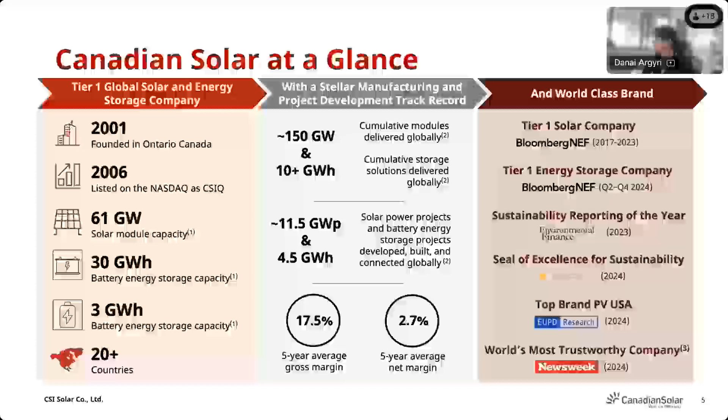On the manufacturing end, which is what we're going to focus on today, we have had cumulative shipments of 150 gigawatts, with 31.1 of them being delivered in 2024. Now, we do have a total system solution approach where we provide inverter system kits, energy storage, and EPC services. EPC services obviously ties more into the project development part of the company, but we also have a wide network of partners like Franken Solar that assist us with being represented in projects across North America.

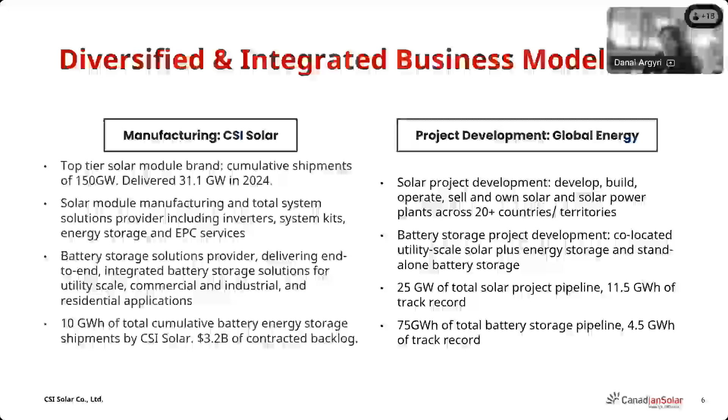Now, with the battery storage solution being also a part of the company, we are delivering end-to-end integrated battery storage solutions for utility scale, commercial, and even residential applications. So between those, we have had 10 gigawatt hours of total cumulative battery energy storage shipments and $3.2 billion of contracted backlog.

And we pair our manufacturing facilities according to the market segment that is being served. So, for example, even though we do have manufacturing facilities in Texas and we're creating one in Indiana, there's no reason Canada should be burdened with any of the additional cost adders that we see with US domestic manufacturing. So Thailand is better able to serve the supply needs for the Canadian market.

So rest assured that you're not dealing with any of the cost adders that we've had to implement in other markets in North America, so that we remain competitive there. Now, with all that being wrapped up, I can move us into the module portfolio.

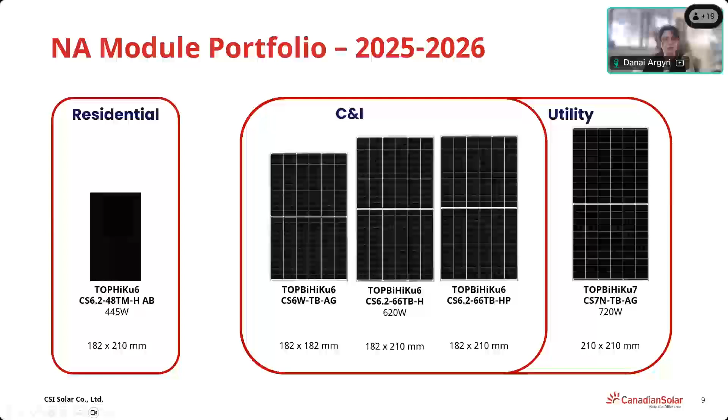Now, Susan, if you can help me launch a poll to see what feature is the most important to you in a residential module, I'd really appreciate it. So the answers here are high power and high efficiency, high loading pressure allowances, high temperature reliability and improved long-term reliability, or 4, a longer warranty period.

Okay, right now the votes are coming in. Yeah, I can see the data changing in real time. Perfect. It seems like for the vast majority, we have high power and high efficiency. And the second leader there being high loading pressure allowances. We can give everyone a couple more seconds to participate in the poll if they want.

It's a big topic nobody ever talks about, I think, with the high loading pressure. I do feel like panels have gotten weaker and weaker over the years, and larger, right? As they get larger and larger, exactly, they are becoming less tolerant. I do have a pretty big section on that, so you will allow me to geek out for a little bit on that. Perfect. And feel free to ask any questions at that point. One key selling point for me is that you don't necessarily have to reach the upper margin of the pressure allowances to be able to benefit from an overall module. So I'll explain my thought process behind that when we get there.

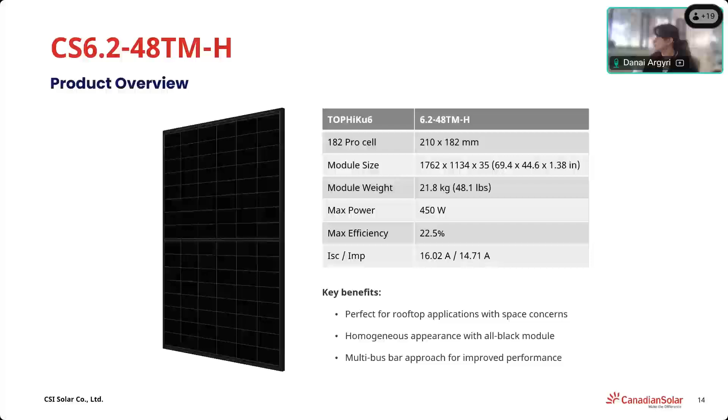Now, we've also implemented a multi-bus bar approach that helps us improve the performance of the module by mitigating the risk of microcracks, something that just naturally comes with the area. Now, I did mention that we do get a higher yield out of this module, and that is where the PTC rating comes in to quantify that benefit.

Now, PTC stands for PVUSA Test Conditions, and it's a rating that the California Energy Commission provides. So in the US, it's a strict requirement, especially if you want to get financed, to have the module that you're using listed on the California Energy Commission. And what they do as an organization is they try to evaluate what is going to be the output of the module that they're listing in conditions that more closely resemble what's going on in the field.

So when we say that we have a 450 watt module, that means that when put under standard test conditions, the output of the module is going to be 450 watts. That's the nameplate. However, when put under the sun, like out on your rooftop, you're not going to get 450 watts, and you're going to get something closer to the PTC rating. So that's where we see a very big benefit with Canadian Solar modules.

I have, in this application example, compared us against another tier 1 manufacturer, where we see that our 450 nameplate yields 427.4 watts under PTC conditions, whereas a 450 watt module from another tier 1 manufacturer would yield almost 2 power classes down, so 417.8. For them to reach 428, they would need to be offering a 460 watt module.

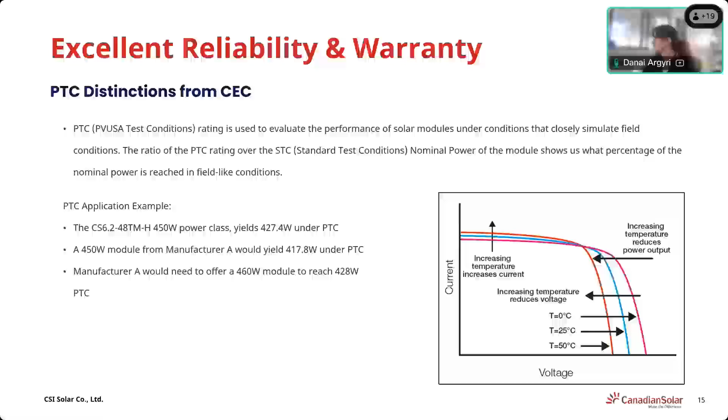Now, moving on to the second benefit of the product, it's perfectly sized for residential applications. So this is the older cousin, the 6.1-54TM-H, the Gen 1 TOPHiKu6. And its absolute max power bin would be 455 watt, 22.3. Now at 450, we're able to bring the efficiency up to 22.5.

Now I do want to differentiate between cell efficiency and module efficiency. Cell efficiency is what we were talking about in the very first slide, something that gets elevated just through favor of cell technology itself. What module efficiency is here to measure is the power output of the module divided by its surface area multiplied by standard irradiance. So as we are decreasing the area of the module by maintaining a similar power, we're shooting up the efficiency.

That is not where the difference between the modules stops. Again, we have 38 millimeters shorter. We're able to bring the weight down by more than a kilo. And we do that while retaining the 35 millimeter frame with a back bar that helps us remain at the top for pressure allowances. Now, another maybe not so important to you, but interesting from a design perspective change was that we were able to reduce the number of cells to 48 by increasing the size of the cell.

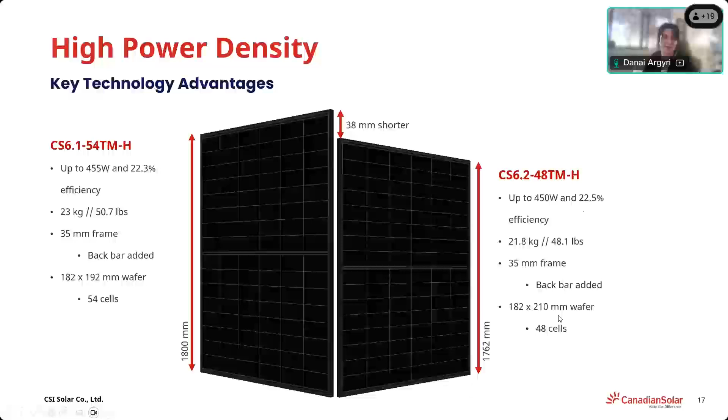Now, here we're about to go into one of the meatier parts of the presentation. So I'm going to coffee up, and it's going to be extreme weather resilience. So that includes temperature, that includes pressures, that includes hail, and so forth.

Now, before we go into the pressure allowances themselves, let's consider how we got to that point. Here we introduce 3 modes of mechanical testing that we go for at Canadian Solar. To get into each one, per the standard, Mode 1 is mandated by code and is concerned solely with safety. The standard calls for the maximum load that may occur during the lifetime of the project to be tested times a safety factor of 1.5 as a static load.

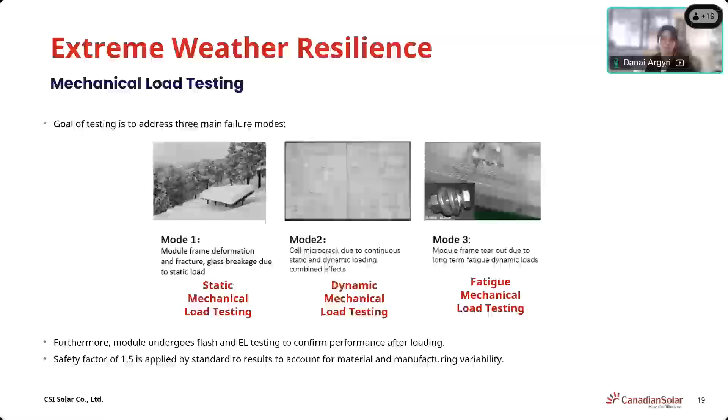So essentially it provisions that this maximum load can occur without causing any physical deformation to the frame, causing glass fracture or breakage, or causing the module to fly off the roof. So it aims to prevent any safety issues in the field without concerning itself with any production losses or similar performance issues. Now, with all that being said, there's more that can happen during the lifetime of the project, right? So despite maybe never encountering that maximum load, you will most likely encounter some snow or wind events that could affect the performance of the module.

So on a heavier snow day in the winter, you will have a higher load applied to the module that could lead to microcracking. Now, we talked about microcracking and some of the things that we do to mitigate it, like the multi-bus bar approach, but it's not a specific issue to Canadian Solar. It pretty much just comes with the territory, right? When I used to work out in the field commissioning PV projects, I saw too many installers stepping on these things. Just any amount of force on them is fertile ground for microcracks. So there's definitely some responsibility in how we install these products and how we maintain them, but there's also parts of the manufacturing process that we can implement to assist them.

So where Canadian Solar differentiates itself is in all the measures it takes to minimize the effect of a possible microcrack. One of which being the Mode 2 testing, which allows us to better understand how well the module can sustain these pressures and how that affects its performance. So in this mode, we apply the force as a static load first, and then we do dynamic testing. So in essence, cycling the module to see how the crack propagates and how that affects its performance.

Quick tidbit here, the multi-bus bar approach essentially means that we're able to minimize the distance that a microcrack can cover before it starts affecting another part of the cell area. So by minimizing or segmenting the cell areas, we're able to stop a microcrack from developing further. And that is the same logic behind the half cell approach. By splitting the cell in half, you're able to stop it at half the distance than what it would regularly cover in order to go into the next one.

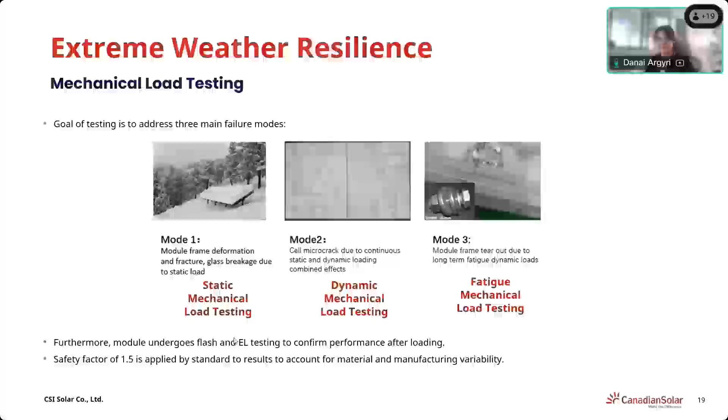Now, moving over to some of the pressure allowances that we can boast. Actually, if I can have one moment, because I know you guys use clamping more, right? So this, we have a very detailed installation manual. And if you go on it, you'll find for the residential both clamping and bolting options, and both of them cover quite some ground.

Now, for anything that's not covered in the installation manual, we do have product compatibility letters for like Unirac or other big racking manufacturers that have some kind of design intricacy that would throw them a little bit outside your regular clamp or your regular bolting method. We do have those available. We have a customer portal on which you can sign up as a user to get info on all of our technical documents, including our compatibility letters.

Now, let's say you're using a clamping method or a bolting method that is so unique to your project that it's not covered by either. You can work with us directly for us to evaluate your project, and if approved, issue a project compatibility letter, essentially saying that, hey, you can use that, we're not voiding any warranty, etc.

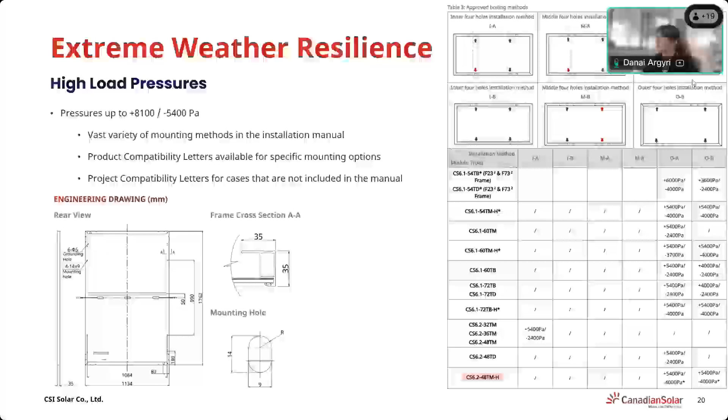So the way I understand Canadian projects, I think 90% fall under this 4-point clamping configuration, for which we are able to boast up to 7,000 Pascal downforce and 5,400 Pascal uplift. Now, the same way that here we give you the type of mounting holes that you can use for bolting, what we'll give you for clamping is a range from the end of the module. So I believe that for 7,000 Pascal downforce, it's 450 millimeters to 550 millimeters. But similarly, you'll see a matrix for your installation method and so on.

I'll skip over the other ones or go through them a little bit more quickly because, again, this is the most widely used one. But if you did want to add an additional rail, we can bring the pressure allowances up to 8,100 Pascal downforce and 6,000 Pascal uplift. I mentioned earlier in the beginning slides that you don't necessarily need to be calling for these very high pressure allowances in order to benefit from a module like that.

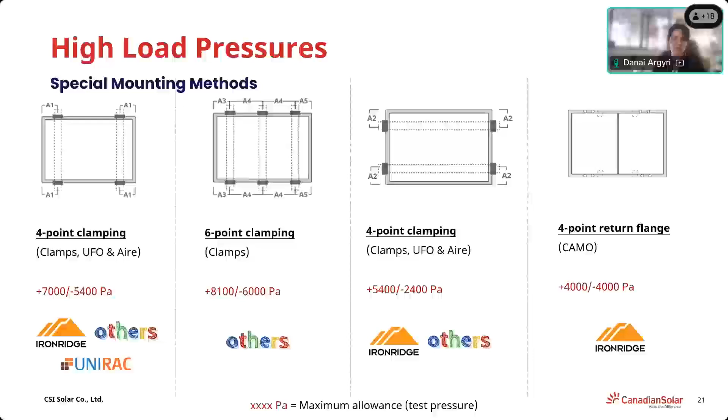For example, if you wanted to go with very light hardware, let's say using the return flange as a structural member and just use some CAMO clamps, you're able to cover a wide variety of projects that would fall under this 4,000 Pascal uplift and downforce allowance. Similarly, you could go with a railless option that still gives you a pretty high allowance, something that a module from another manufacturer that doesn't put as much effort into the frame as a structural member or the mechanical rigidity of the module might need more of a hardware-heavy approach in order to be able to reach those, for us, lower pressures.

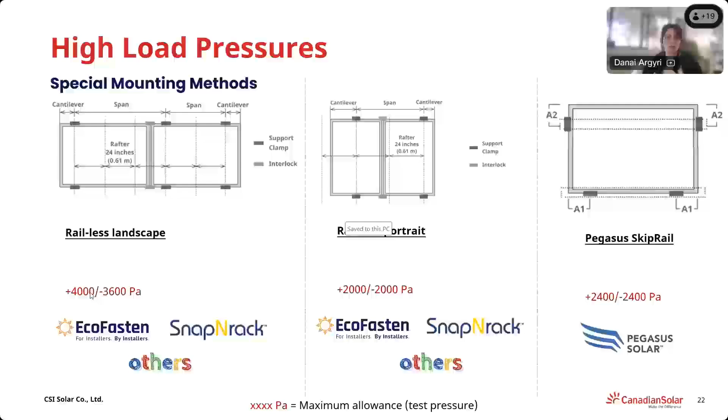The other way in which we're trying to be weather resilient is through elevated temperature testing. So the standard that we're using here is the IEC 63126, where we've achieved level 1 certification. It's not required in the US or in Canada. It's more so relevant to other regions of the world where the extreme conditions it covers are more prevalent. But the idea is to test at more severe testing conditions to see how the module behaves. And if it passes, the expectation is that the module can withstand much higher temperatures throughout its lifespan.

And that doesn't mean that it's not a good module to install or reliable. It just means that it doesn't fall under the scope of level 1, given that it exceeds the 80 degrees Celsius provisioned. So it's not required in North America. It is a nice to have, especially seeing how some typically cold areas have been experiencing extreme heat events.

So did I miss the speed at which the 1.77-inch hail is launched at the module? I think here we only offer a snippet, and this is a mechanically equivalent product, so that's why we're able to use them interchangeably. But we do repeat these tests at varying speeds. Sorry to backtrack, I just noticed the question in chat and I want to get to it. You are able to get the full report that goes into the passing rate at different speeds and different hail sizes, so I would be happy to provide that afterwards.

Well, I think 20 meters per second is usually the standard test conditions, right? I feel like that number is what I have in mind, because I think some competitors put it on there. I think I've seen it on a different data sheet. Okay. I would have to look at the report because I know that throughout the entire test, we are incrementally adjusting some factors. That includes angle, position of being hit, etc.

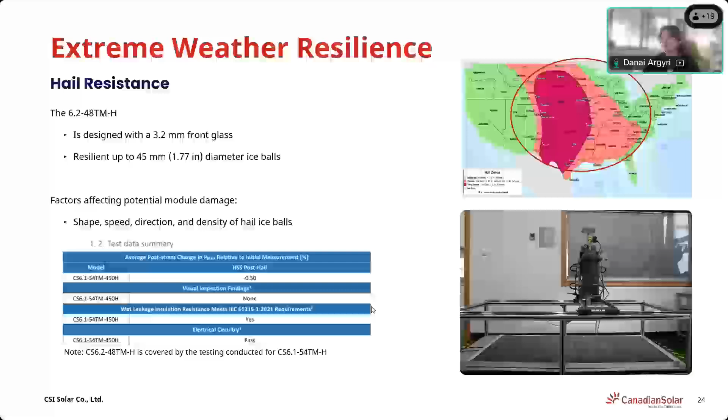But everyone's doing the same test. So if another one is saying 35 millimeter and you're saying 45 millimeter, it's the same test, right? Yeah, we're all using IEC, presumably, or the good ones are. Yep.

Now, back to the MLPEs, we talked about the necessity of being able to de-energize the array. This is the role optimizers and microinverters come to assist with. The list here on the left represents our compatibility with some of the key players in the market. Where we see a lot of the Canadian market landing is with Hoymiles and APsystems. I have refrained from using their newer models, not because we're not compatible with them, but because we fall into that flexibility zone where some of their new models have a 15 amp short circuit current limit. And for the 445 watt variation of the TOPHiKu6, we are closer to 16. I think it's 15.8 or 15.7.

I can just jump in quickly. I just got the answer from one of the competitors, the same one we mentioned earlier in the meeting. They specified 25 millimeter hailstone at a speed of 23 meters per second. Thank you for looking that up. Appreciate it.

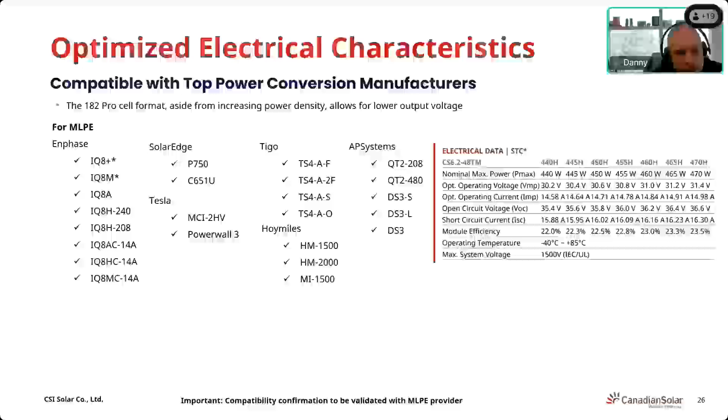Danny, am I correct? Yeah, we looked it up last time. So specifically looking at Hoymiles here, all the Hoymiles, the new inverter HMS, they're all working just fine with the current Canadian Solar panels. No issues. There's quite a bit of headroom actually because they got quite a bit more extra current headroom now. Yeah, since our last webinar, I have also reached out to them and I'm trying to work with their product management team to see if we can get an official compatibility letter in the works.

So that's all on MLPEs. If you are working with inverters, we have the benefit of the added 2 modules per string as compared to smaller wafer sizes. So if you're comparing it to the 7N that has a 210 by 210, the 210 by 210 will be able to fit more, but we're not putting this guy on the tracker.

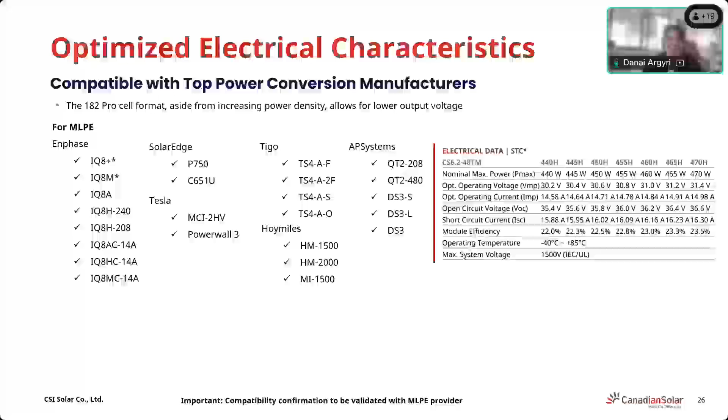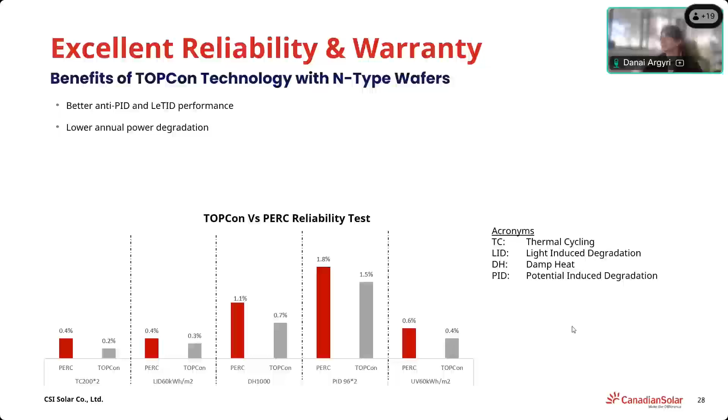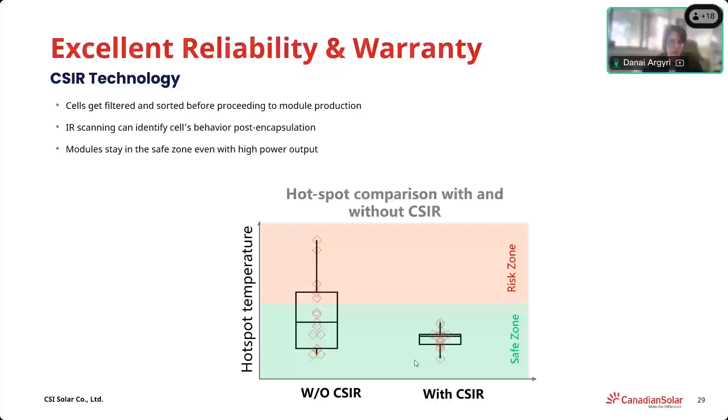I was blowing up my inflatable kayak the other day, and I saw it certified by TUV.

So they work across the board to make sure that when a company says, hey, we have a good product, they're the ones to put their stamp on it. And that's who we use to qualify our PAN files.

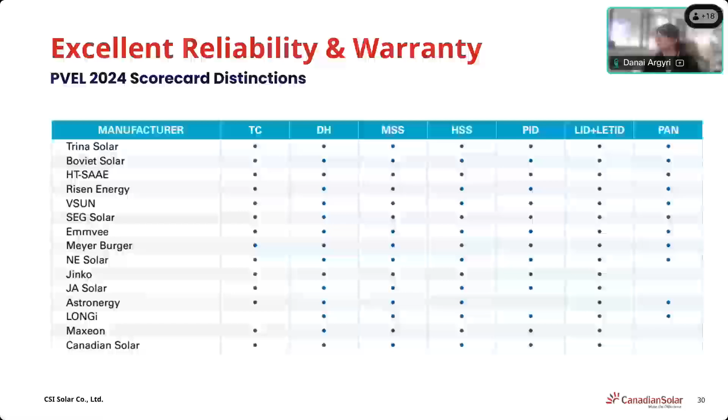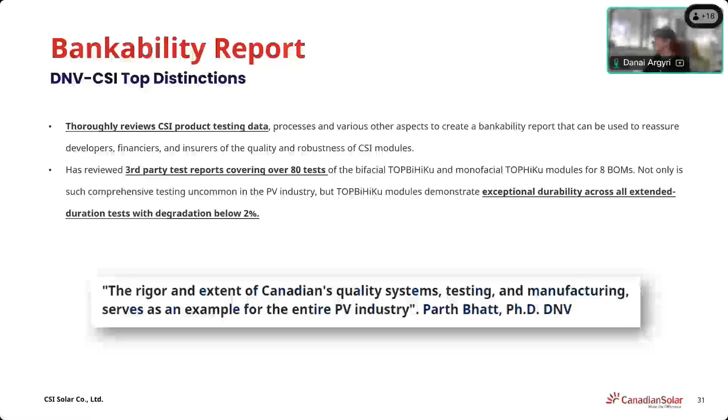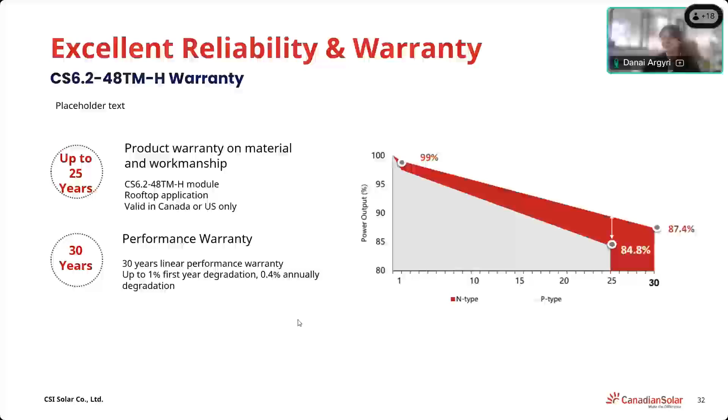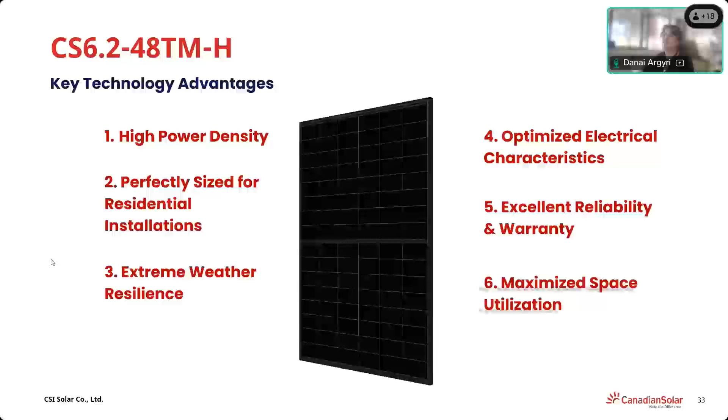So this is, again, third-party externally validated, and we're able to provide that to your financiers so that they can have the confidence in your project that we have too. Now, last but not least, we do have the maximized space utilization as a core benefit of this. It does tie into what we called perfectly sized for residential installations, but with some more tangible examples.

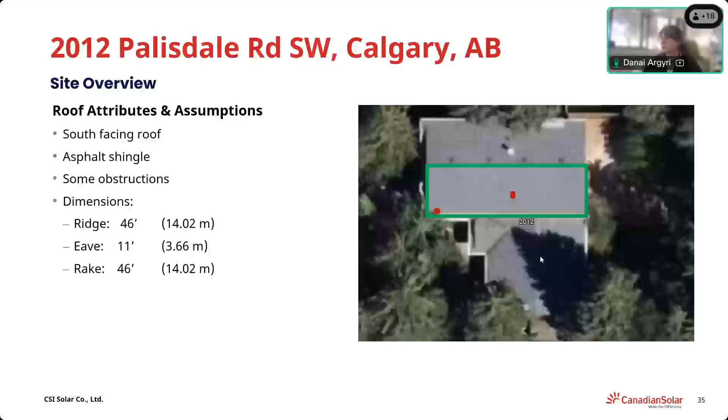Now, this number makes sense because that is more akin to what we use for our commercial modules, right? You do get the better power, but you don't really get it in a package that is specifically tailored for residential applications. And we can see the first example of that with a roof in Calgary. So, pretty big roof, not a lot of obstructions, generally a good one to test that.

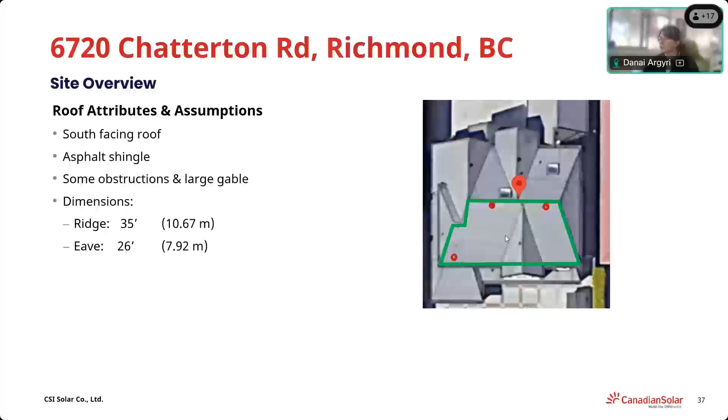Taking another example with a little bit more of a complicated roof in Richmond, British Columbia, where we see some more odd shapes, some more obstructions and whatnot, where we can't get too close to these lines, or I guess we can get close, but we can't cross over. And here we come out with something like this.

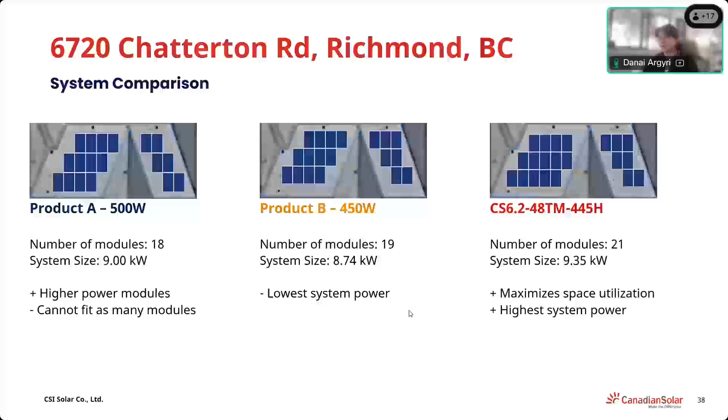Now, I haven't gone into the financials of this because they will vary installer to installer, site location to site location, and so on. But I did want to highlight that because we have this marginal improvement in the length of the module, we're able to fit in some tighter spaces that can be particularly valuable when we're working with either an odd shape or an obstruction of any type.

Now, last but not least, I just want to summarize all of the key benefits that we brought up today, in that we do offer in this module a very power dense product that is packaged in an aesthetic combination of features that would bring value to any homeowner. That's just where the standard is set for residential applications.

It also comes with strong reliability, both in terms of what can be translated into warranty terms, but also in terms of what it can take in terms of pressure and hail resilience. And it's a very easily combinable product, both across racking manufacturers that we work with and MLPE manufacturers that mobilize in the sector.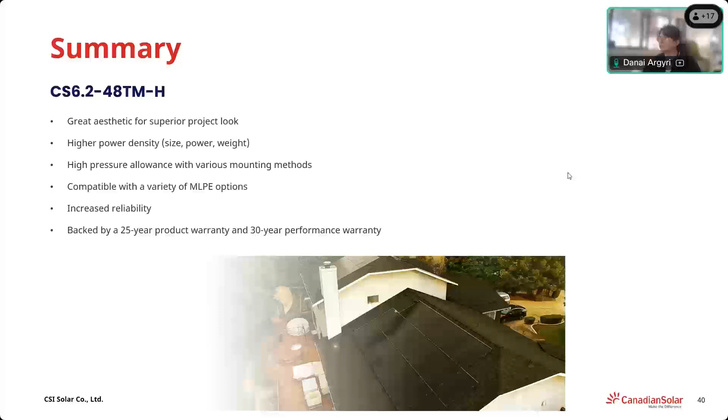Now, all of this is going to be backed by a 25-year product warranty for rooftop applications and a 30-year performance warranty with the terms that we talked about earlier. So with that, I want Susan's help to launch the final poll, which is what features should be improved further for our next residential module?

Similar format and answers. Your first choice is high power and high efficiency. Your second one is high loading pressure allowances. Third is high temperature reliability and improved long-term reliability. 4 is longer warranty period. And 5 is none, this is the module I need.

Susan, I'm staying out of this one, so I can't see the results. But when we close it out... I don't want to muddy the data, you know.